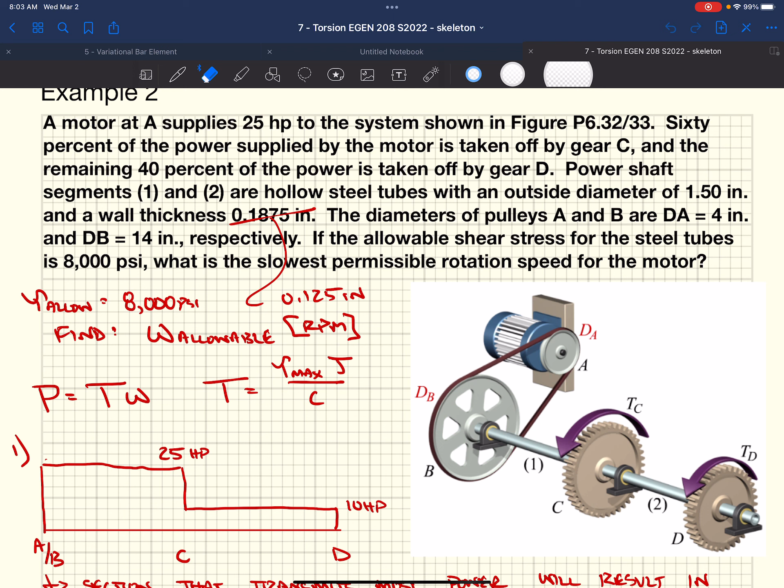So on Monday, we went through this example which helped us relate power in shafts, in particular for this class, power in circular shafts. How that power can be distributed both via gear ratios and different shaft dimensions and sizes, and how that power that is provided into a system is the torque times a rotational speed. That torque can be a function of, in our case, we were given a maximum shear stress that the shafts in our system can handle. And so that's kind of our governing limit, that's limiting how much power we could put into this, or in this case, how much speed, because we were given an amount of power that we were putting into the system. So we worked through that to figure out what is the speed of the motor required in order to not overcome the ability for our shafts to resist that torque. So we went through that.

Now we're going to start talking about, similar to what we did in axial systems, indeterminate torsional systems. What does that mean? Well, we have more unknowns than we have equations of equilibrium. In axial systems, we had some of the forces and some of the moments, we had 2 equations of equilibrium, usually. But now in torsional systems, we usually only have 1, summing the moments along the axis of our shaft.

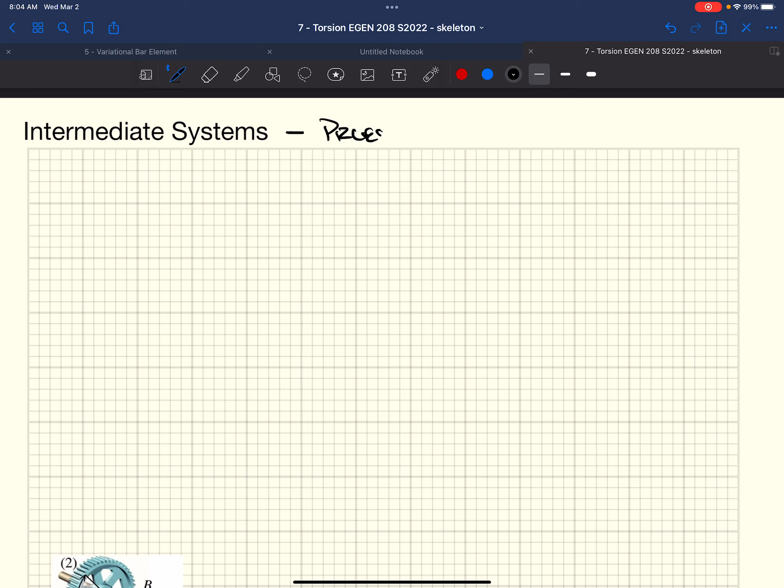So we are going to talk about the process involved with, welcome. What'd you do? Oh, I hurt some cartilage in my knee. Ouch. Are you done for the season, I assume? Yeah. Bummer, didn't mean to rub it in.

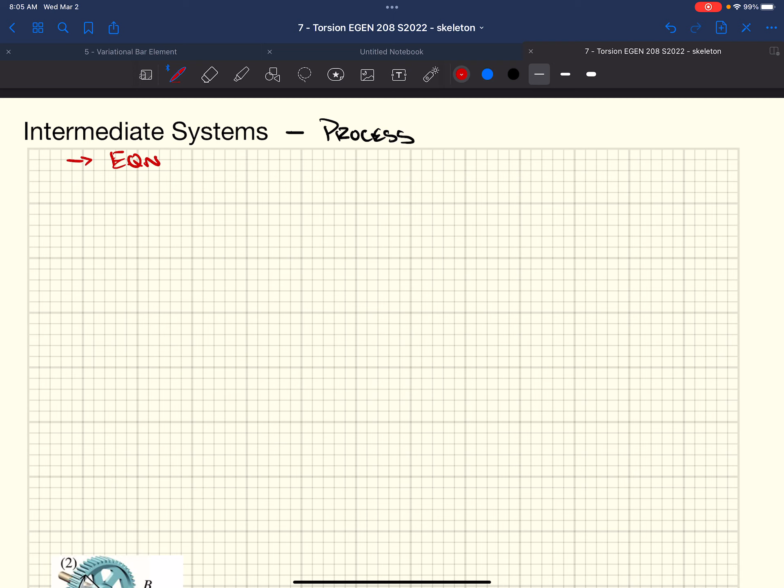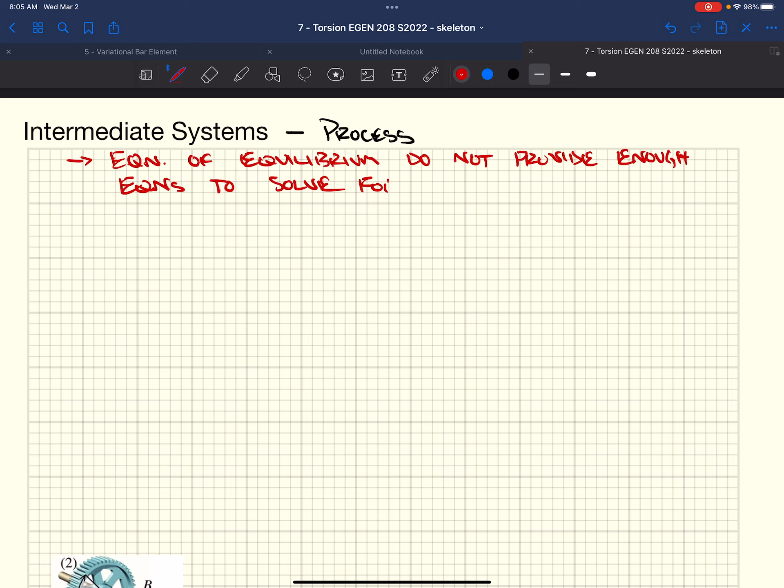So what's the process here, if we have an indeterminate system? Well, first off, when we have an indeterminate system, we have our equations of equilibrium, and they do not provide enough equations to solve for unknowns. And in this case, we have sum of the moments, that's what we get, sum of the moments.

So any guesses of where we would start? What's the first thing we do in all of our mechanics problems? Free body diagram, exactly, way to go. I need to bring candy or something, that was a big win. All right, so we do a free body diagram.

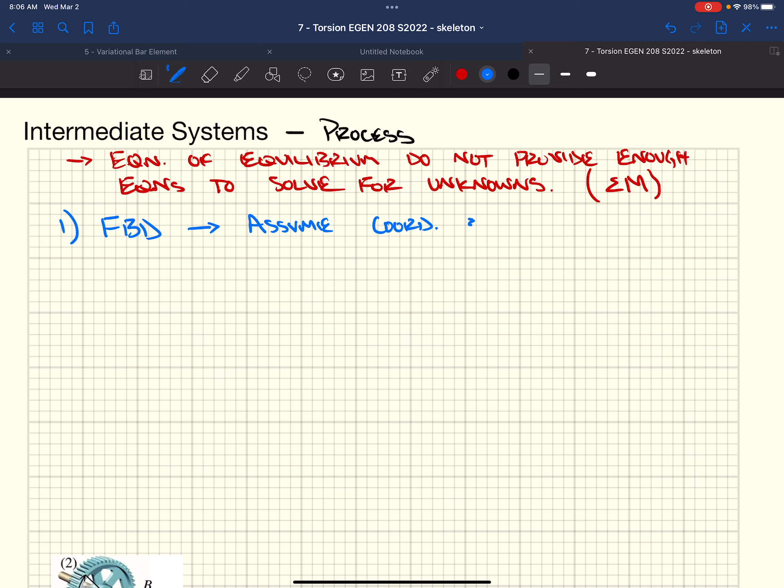In a free body diagram, we always assume coordinates, we provide our known forces on our system, display our unknown forces in our system, and based on those unknown forces, we can use the equations of equilibrium. So assume coordinates, and we're going to find our expression for sum of the moments equals 0. That is the only equation of equilibrium that we have in a torsional system, because we're essentially summing the torques. A torque is a moment, all a torque is a moment about the longitudinal axis of our shaft. And so we only have that, we have no other forces acting on the shaft.

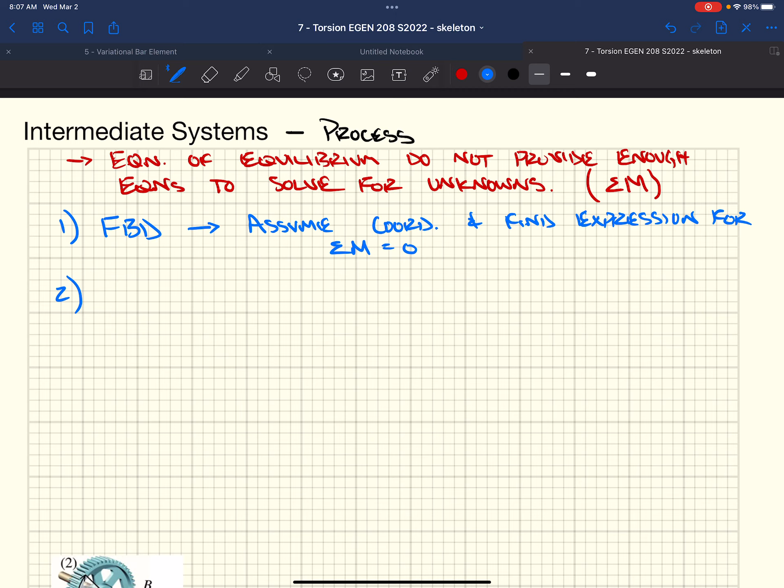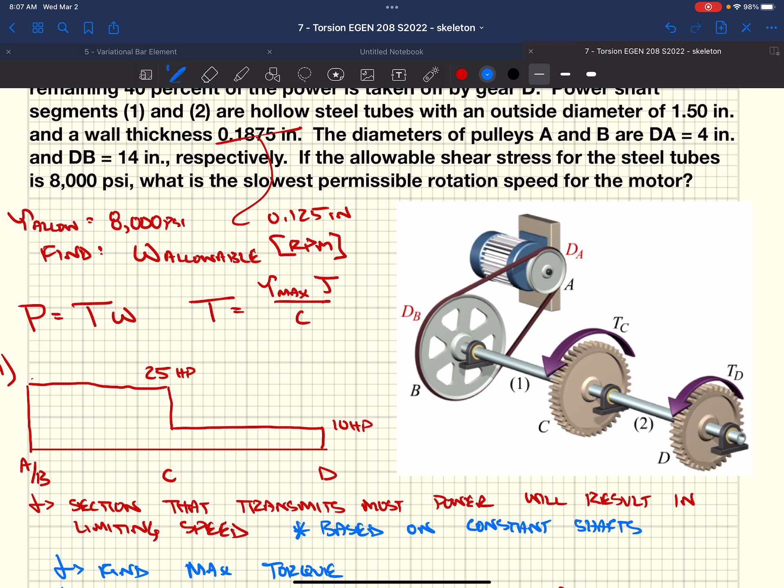Well, at this point, this is where we decide whether it's determinate or indeterminate. All of the problems that we've dealt with to date are determinate, okay? We've either been given what the extra loads are, or we only have one unknown force or torque, so we could calculate what that was.

If we do not have that, similar to the axial systems that we calculated that were indeterminate, do you guys remember what that next step was? Step 2, in indeterminate axial systems, what's the next thing we did? Set up a relationship. Perfect.

God, you're crushing it. Are you looking back at your old notes or what? No. Oh, damn it. Just a powerhouse over here.

All right, determine how the system will deform. Setting up those relationships, okay? And there's a lot of different ways that we could have a torsional system set up, similar to the axial system.

If I drew a little picture here: a shaft, and in that shaft we had a core. Say that shaft was fixed at one end, and we could apply a torque to the end of that, okay? So we have two materials, our first material and our second material, and those materials were inside of one another.

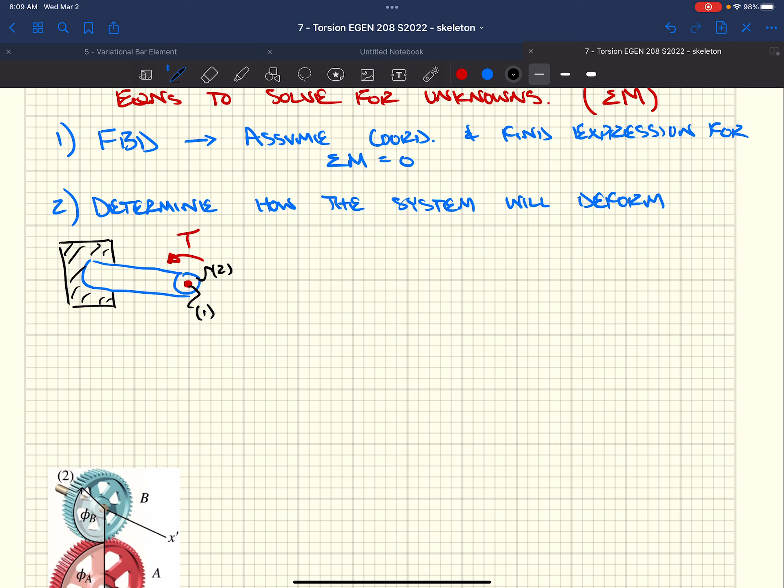So material 1 is inside material 2, they're connected inside that system. So if I rotate material 2, I'm going to rotate material 1. So if we wanted to determine the rotation of material 1, it's going to be the same as material 2. So our relationship would say that the deformation of all members is equal. That means phi1 equals phi2.

Second one: in some cases, this would be what I'd call a system in parallel. We have our two materials that are running within each other, running together, or in parallel.

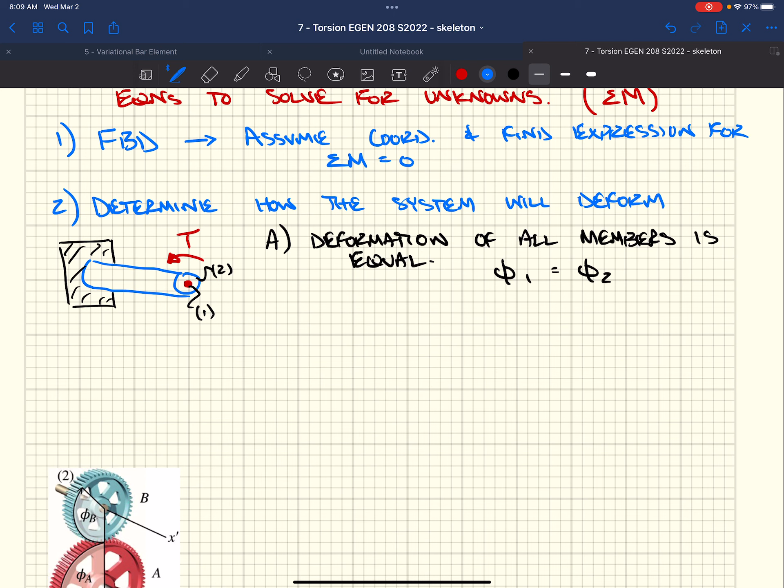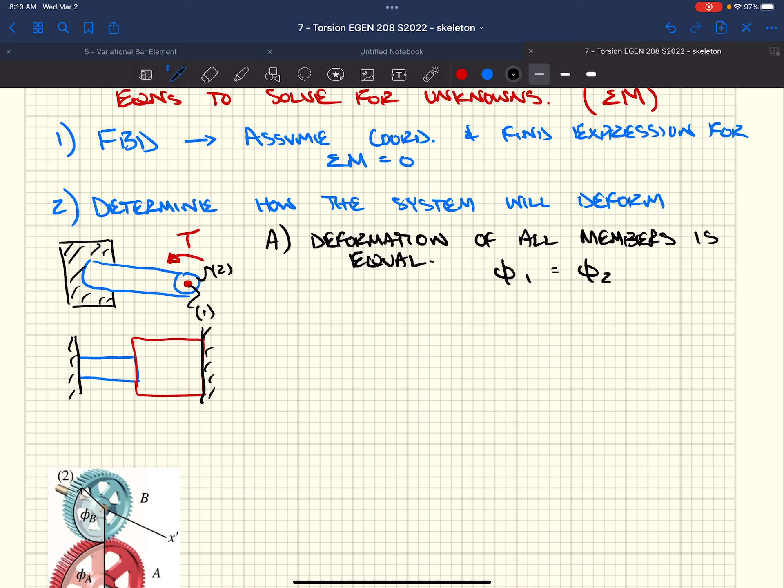Sometimes we might have a torsional system similar to what we had with our axial systems, where we have a system of shafts in series, maybe between two fixed plates. We might apply a torque within that system, at the interface between our two materials.

In this case, the total deformation is equal to 0. So we have phi 1 plus phi 2 equals 0, which is really phi total. Because we have our fixed plates, this shaft doesn't rotate from one end to the other. So if we run from our left-hand side to our right-hand side, we start at 0 rotation at our fixed support. Blue is going to rotate clockwise, and then red we have to rotate back counterclockwise to get back to the same spot as we were at the beginning, which is 0 rotation.

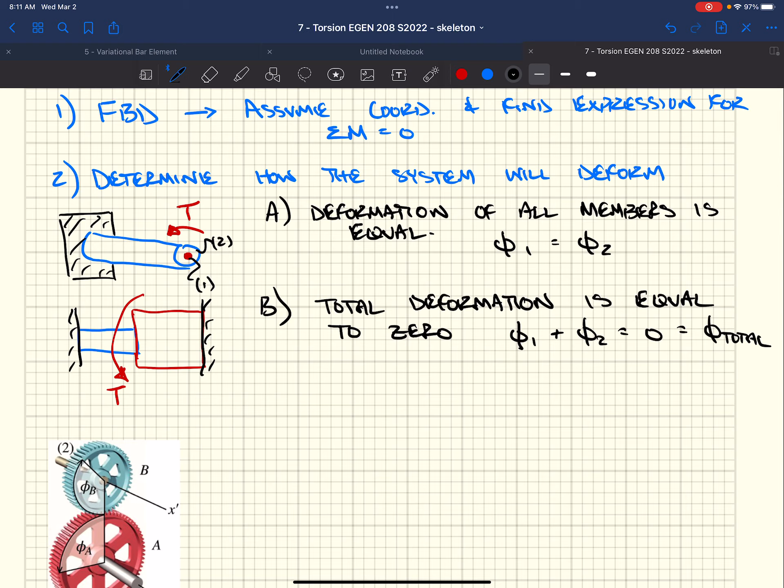Well, we've talked a bit about gears, gear ratios, and how those affect torque provided and how those can affect speed, and how that rotation can also be related between these two gears. Even though these gears are different sizes, the actual distance traveled has to be the same. So we can also reference the rotation: if A rotates a certain amount, B's got to rotate a certain amount, and the amount of those rotations is subject to our gear ratio. So we can come up with what we would call angular relationships of deformation.

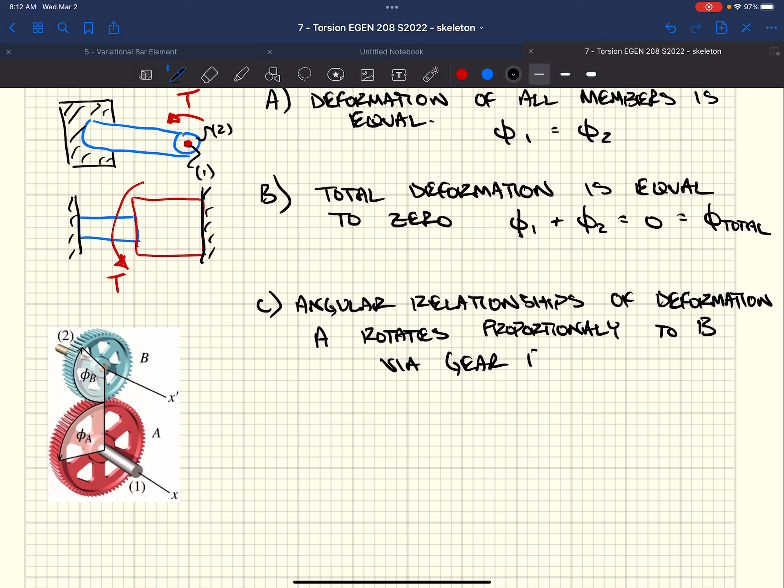We know that A, because of our gear ratios, rotates proportionally to B via those gear ratios.

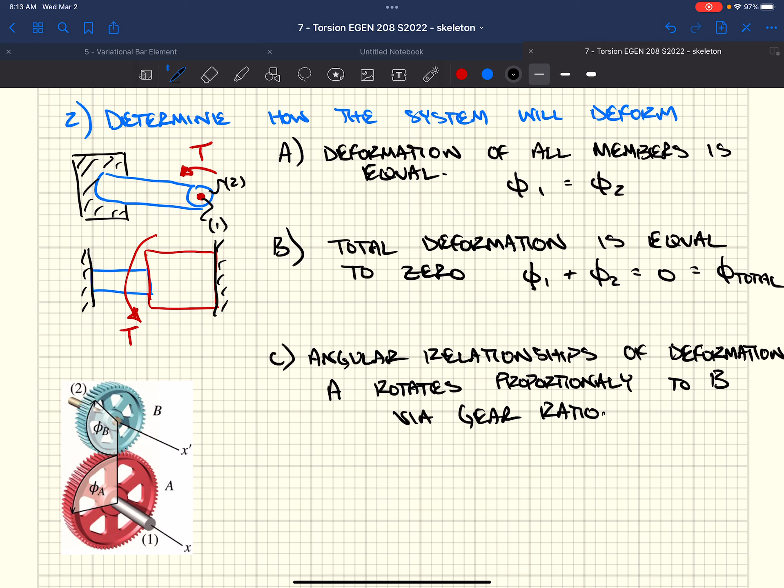So those are our three big types of system deformation relationships, some way of relating the deformation in one member or material to another. Because that's really what we're trying to do, come up with this relationship that we can devise, a way to relate forces. We want to relate force and deformation.

In torsional systems, we call this the torque-twist relationship. In the axial systems, we had this equation, delta. Anybody remember what delta was? We took Hooke's law, stress and strain relationships, smashed them all together, and got this equation that related deformation of an axial rod: FL over AE.

Okay, well we also had something very similar to that in torsional systems, where we figured out the angular rotation in radians. Remember what that one was? It relates torque, geometric properties, and material properties. So we had torque times the length over the polar moment of inertia, times the shear modulus G: TL over JG.

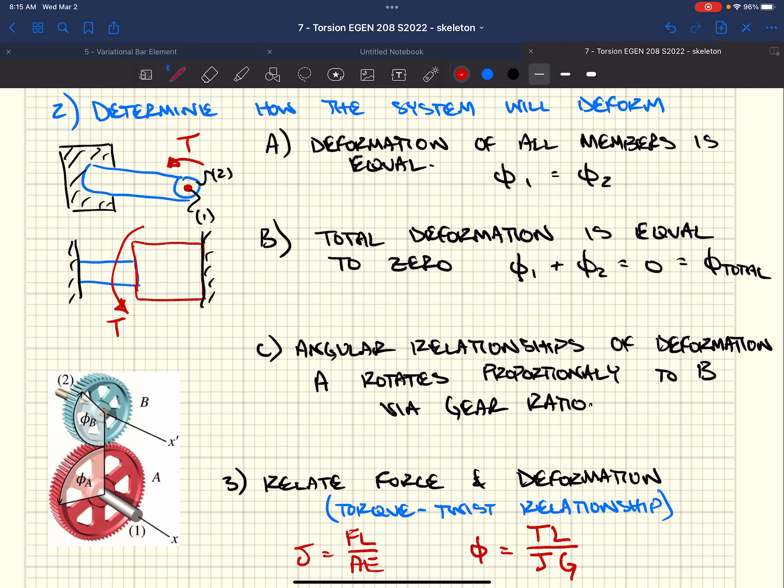So in the axial systems, we took this equation here, and we plugged it into this relationship. We're going to have some relationship that gives us displacements in axial systems, rotations for torsional systems. So we take these phis and plug them back in up here, so we can get another equation.

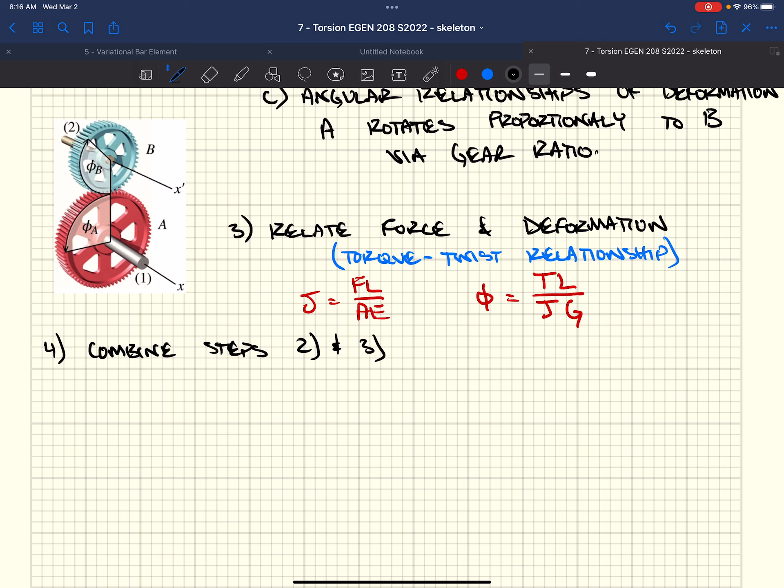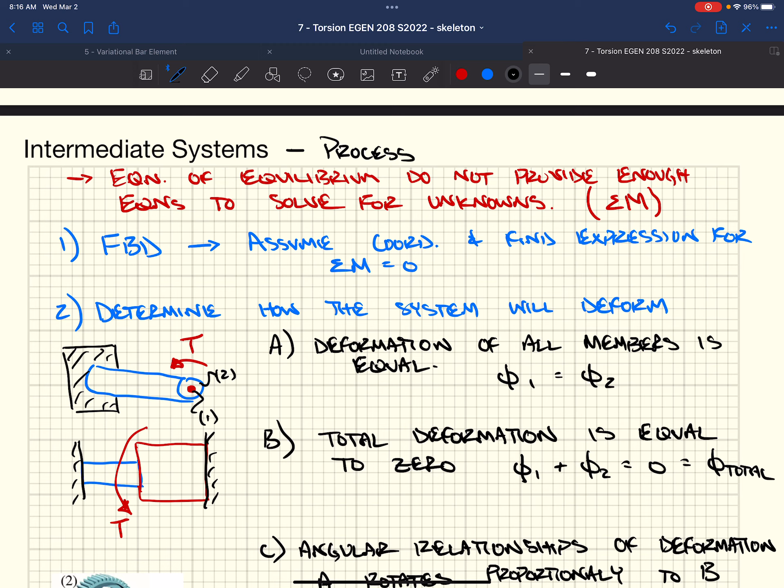So step 4, we want to combine steps 2 and 3, so that the geometry of deformation is expressed using forces. Now we're going to have this new relationship that has our unknown forces, our torques in there, relating the torque in one rod or one material to another, which is very similar to what we have up here when we sum moments, we get the relationship of torque in one rod to another.

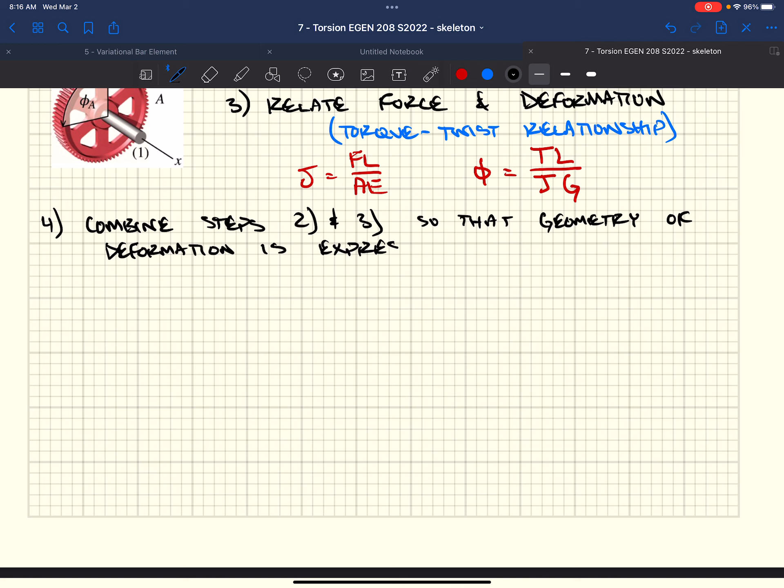And so now we essentially get another equation. We can combine our steps so that geometry of deformation is expressed using forces. We call this the compatibility step, because we were developing compatibility equations, essentially relating this deformation with forces.

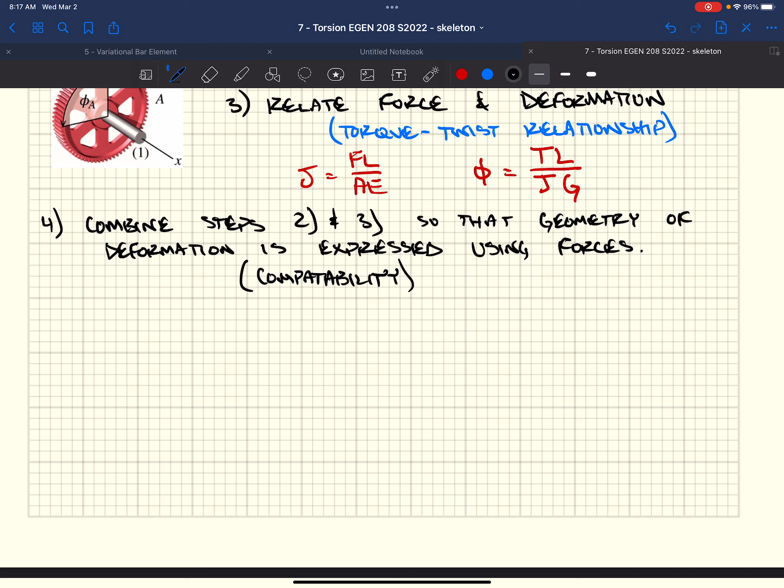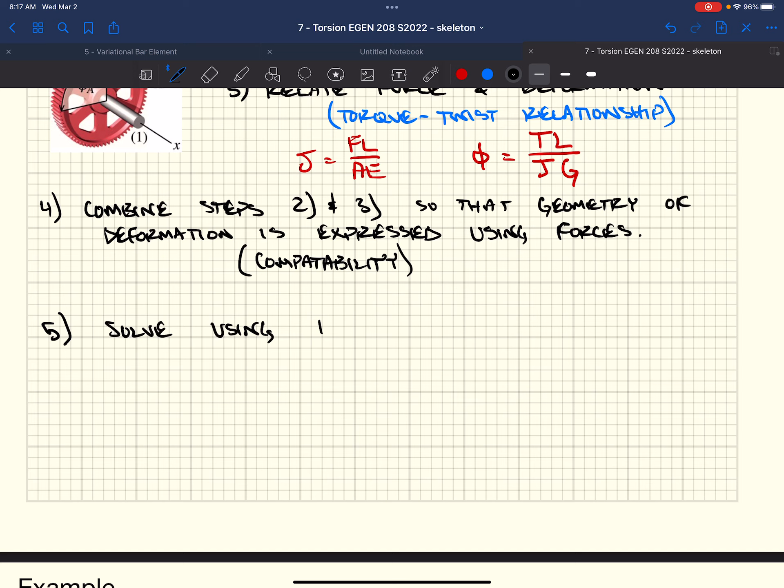And then finally, we can solve these systems of equations using our equilibrium equation. Here, we're trying to solve for torque. And once we have that torque, we can then solve for shear stress in our shafts, and so on.

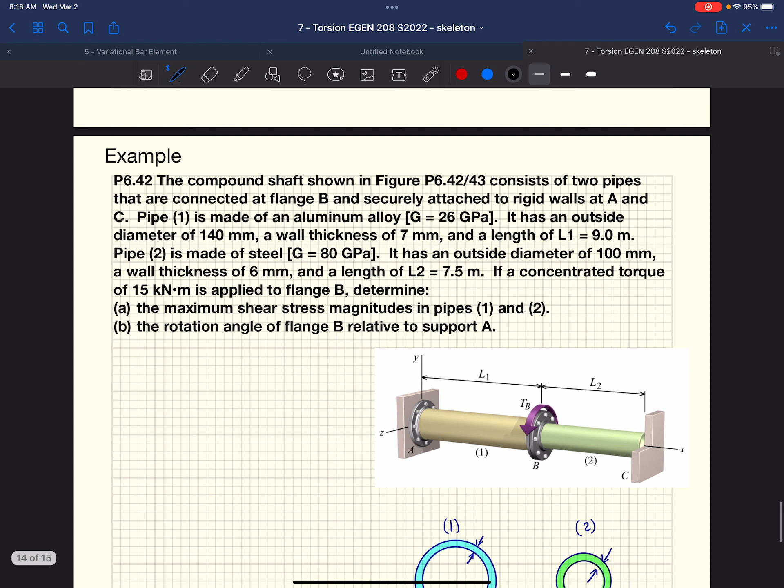Okay, we're going to go through an example. So we have two shafts that extend in series. We've got material 1 to material 2, extending between two fixed plates, and we're applying a torque at the center, the coupler between our two materials.

They give us all sorts of fun information about this. They say that pipe 1 is made out of aluminum, pipe 2 is made out of steel, so we have different shear moduluses for each of those. Steel is 80 gigapascals, stiffer than aluminum at 26 gigapascals. The aluminum pipe, pipe 1, has a larger diameter than pipe 2, so we have a 140 millimeter pipe that runs to a 100 millimeter pipe. And then we have thicknesses of our walls, and we have different lengths, and they tell us the value of our concentrated torque in kilonewton meters.

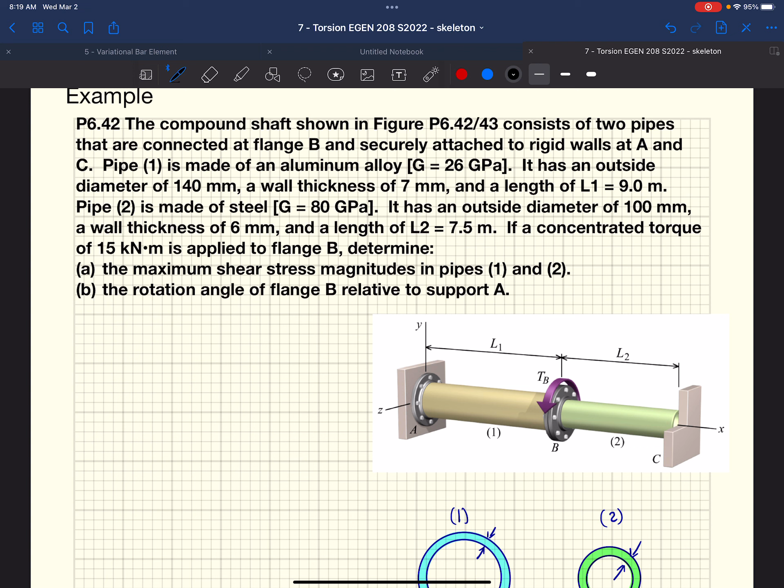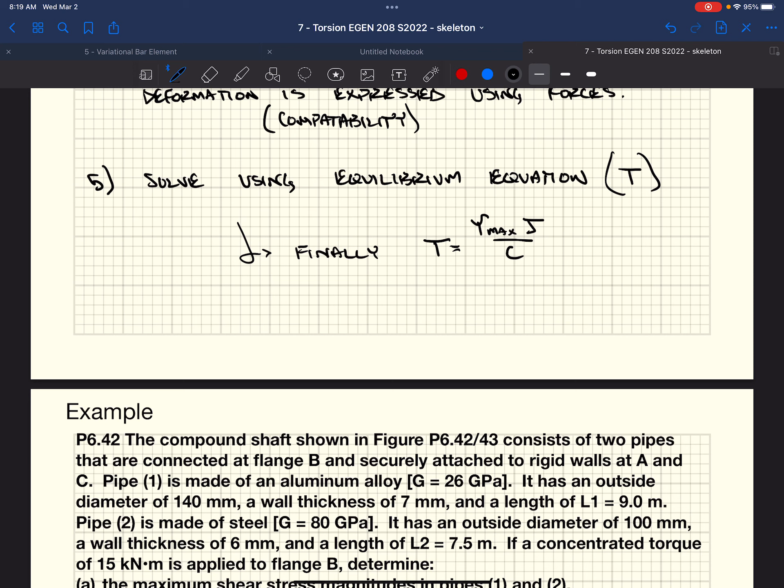And they want us to determine a number of things: what's the maximum shear stress in each of the pipes? As we just found, we have an equation for the maximum shear stress. We need the polar moment of inertia and the max radius, which we can get out of the dimensional information they gave us, the max diameter and the wall thickness. And then we need to figure out what the torque is, which is something we do not know.

Next one: what's the rotation angle of flange B relative to support A? So really they just want us to calculate phi for rod 1, TL over JG. So we can figure that out.

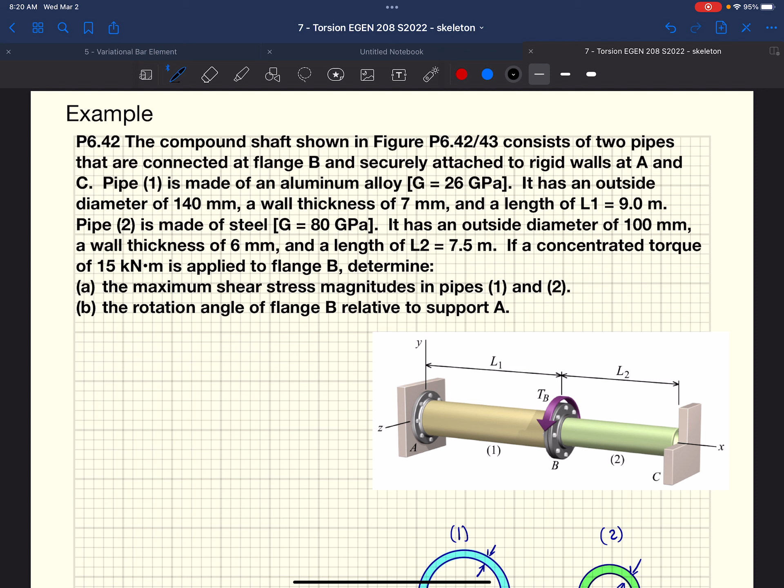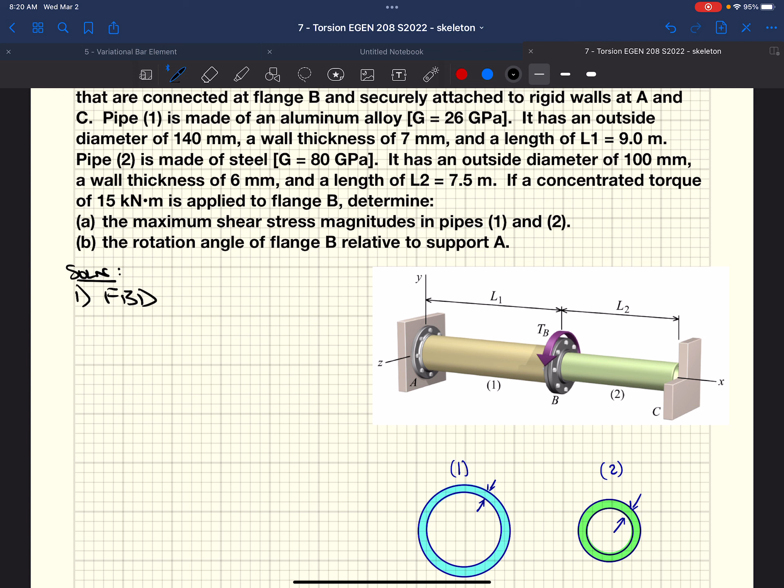So we have one equation of equilibrium, we're going to start there, with a free body diagram. Step 1, we have our free body diagram. I am going to cut, because we need to figure out internal forces.

It probably wouldn't make much sense if we drew a free body diagram to the end. That really doesn't encapsulate our applied torque at the center. It doesn't show us any forces that'll let us calculate known or unknown forces. We'd miss the boat on figuring out what the torque is in rod 2, which they asked us for the shear stress.

So instead, I'm going to cut out the center of this torsional system. This way we capture our applied torque, and I'm able to display internal torques in both rod 1 and rod 2. So we're going to start by saying that's the coupler. We have our 2 rods.

We need a coordinate axes. So I'm going to walk through now, transferring known and unknown forces, in this case torques, to this free body diagram. If I look at the applied torque at 15 kilonewton meters, or TB, and use the right-hand rule, and cut this, so this is rod 1 and rod 2, this x-axis is the same as that one. So if I curl my fingers in the direction of torque B, my thumb's pointing off to the right.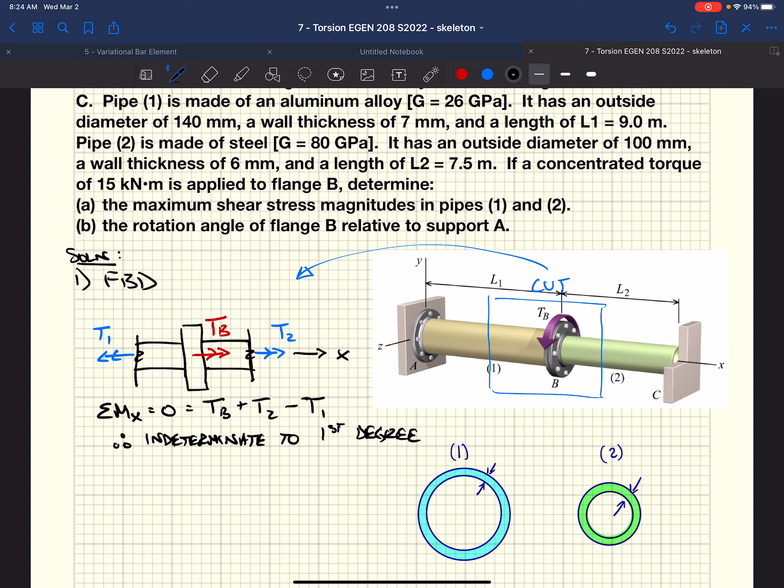As was outlined in our process for indeterminate systems, this is where we start setting up our relationships. We need to assess the deformation.

Let's assess the deformation. Out of our 3 different torsional system types, what can we say about the deformation in our 2 materials? 2, 0, right? Exactly, because we have 2 fixed ends, and if we travel through our system from the left-hand side at A to the right-hand side at C, we're going to start at 0 rotation. We're going to twist a little in rod 1, then twist a little in rod 2, but we got to come back to the exact same orientation we were at the beginning. They're both fixed, they don't rotate.

So we can say that our total rotation is 0, and that rotation, when we move from the left-hand side to the right-hand side of this shaft, phi1 plus phi2 has to equal 0, okay?

Now we get to relate our force deformation, or torque twist relationships. Well, we know phi1 is just going to be the torque in 1, the length of 1, the polar moment of inertia of 1, and the shear modulus of 1. We also know that the rotation of 2 is going to be the torque at 2, the length at 2, the polar moment of inertia of 2, and the shear modulus of 2.

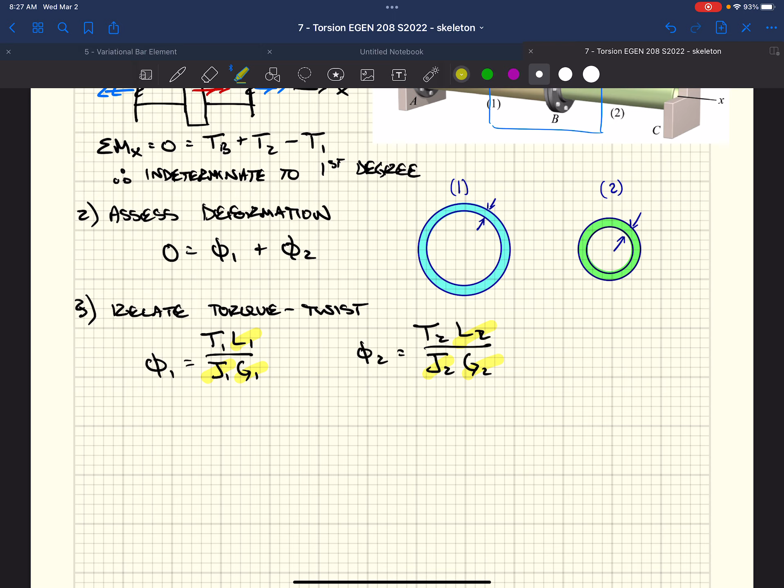In our case, rod 1 had an outside diameter, our big D equal to 140 millimeters. For pipe 2, it was 100 millimeters. We know the thickness for the second pipe, or the steel pipe, was 6 millimeters. And they gave us that the thickness of our aluminum pipe was 7 millimeters.

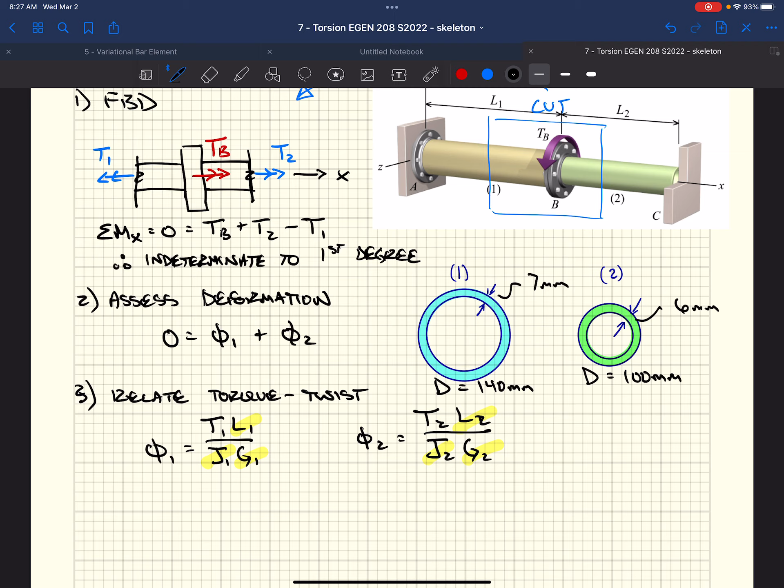Well, we know the polar moment of inertia based on our notes, and based on our diameters, we can say that the polar moment of inertia is pi over 32 times outside diameter to the 4th minus the inside diameter to the 4th. This would be outside, this would be inside.

Well, if we did that for number 1, we take 140 millimeters, we subtract 14 millimeters to get the inside diameter. We could plug those values in. We get J1 equals 12.97 times 10 to the 6th millimeters to the 4th.

J2, we do that same process. We do pi over 32 outside diameter to the 4th minus the inside diameter to the 4th, and we end up with 3.93 times 10 to the 6th millimeters to the 4th.

What does this tell us? This tells us that there's a difference in stiffness between the 2 pipes with respect to rotation. Moment of inertia, as you guys are working in the homework, from statics, is the resistance of a cross section to bending, rotation. So it'd be like this I shape, twisting this way and twisting this way.

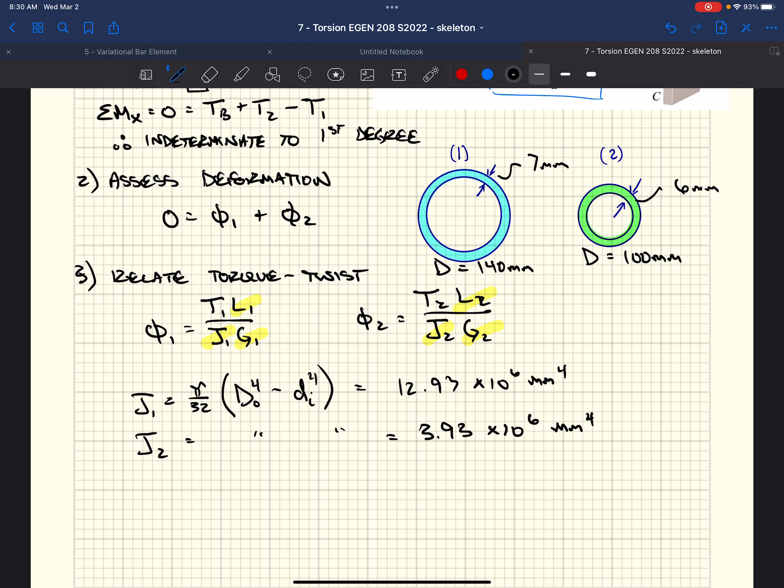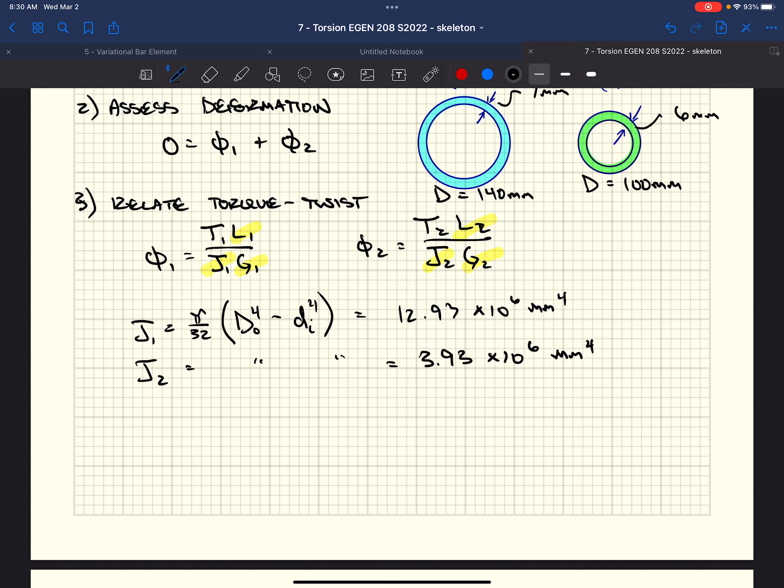So next, the idea is we have this torque-twist relationship, and we can plug that value into our deformation assessment. So step 4 was to combine steps 2 and 3. Now we get this equation that says we have 0 rotation from one end to the other end of our system. That rotation is going to be the sum of the rotation of the first shaft plus the rotation of the second shaft. So we end up getting T1 L1 over J1 G1 plus T2 L2 over J2 G2.

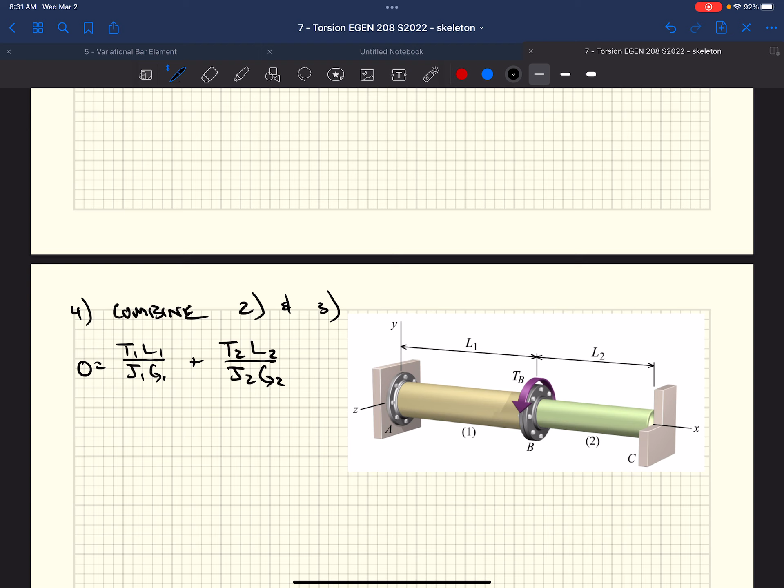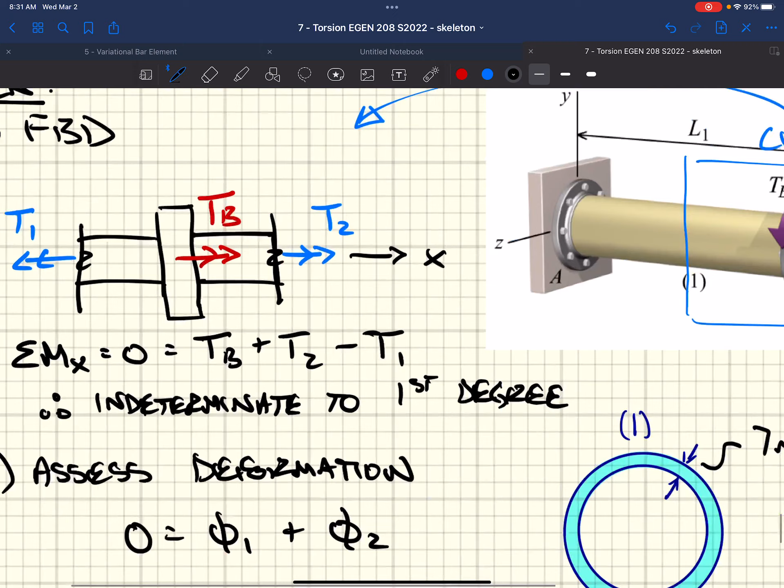Well, we really want to take something out of this equation. Now we have two equations, two unknowns. We have L, J, and G for both of our two members, 1 and 2. The two unknowns in this equation are T1 and T2. The two unknowns in our equilibrium equation are T1 and T2. Two equations, two unknowns. We solve that by manipulating one equation in terms of one of the forces and then plugging that into the other one. So what am I going to do? I'm going to manipulate these equations to get us an equation for, say, T1 or T2. In my case, I'm going to do T1.

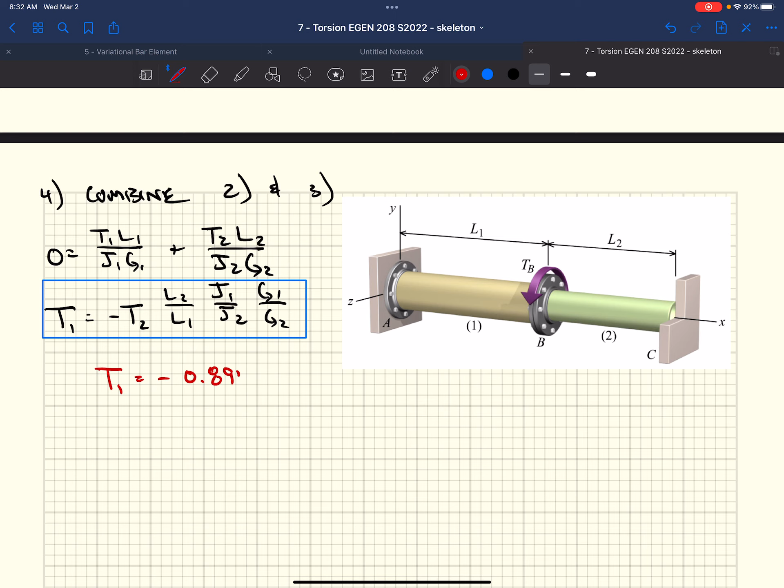So if we rearrange this for T1, we get that T1 is negative T2 times L2 over L1, J1 over J2, G1 over G2. If we take all of those values, L2, L1, J1, J2, G1, G2, we can plug everything in and come up with an expression for T1 equals negative 0.894 T2.

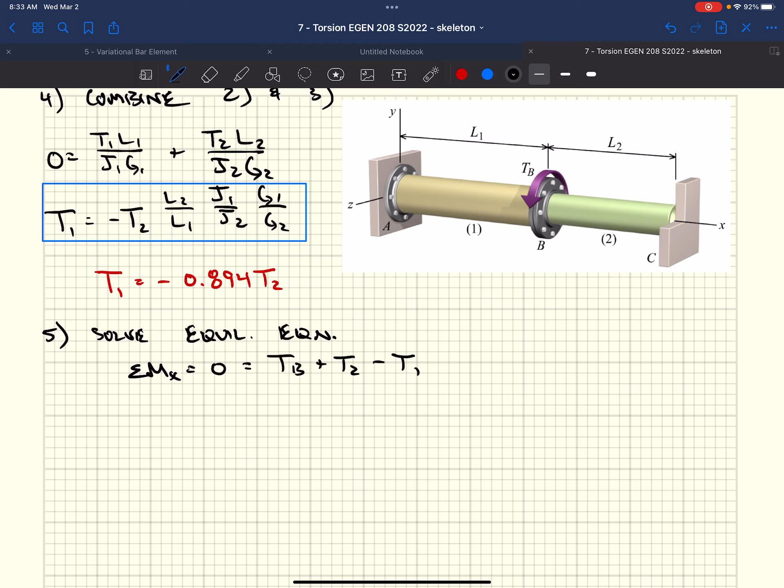Well, now that we have this expression, we take the expression we have for one force in terms of another, and we plug it into our original equilibrium equation. Then we can solve for our unknown forces. So step 5 is we want to solve our equilibrium equation. What does that look like? Well, we have sum of the moments about x, we set that equal to 0. We said it was TB plus T2 minus T1, or TB equals T1 minus T2. That all equals TB, which was 15 kilonewton meters.

All right, plug in our relationship between T1 and T2. So now we have 15 kilonewton meters equals negative 0.894 T2 minus T2. We get T2 equal to negative 7.92 kilonewton meters. And if we plug this back in, we're going to get T1 equal to 7.063 kilonewton meters.

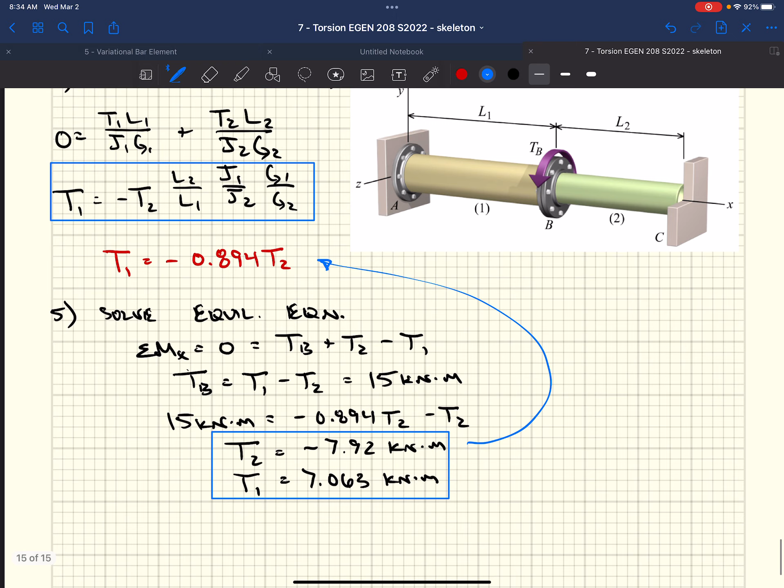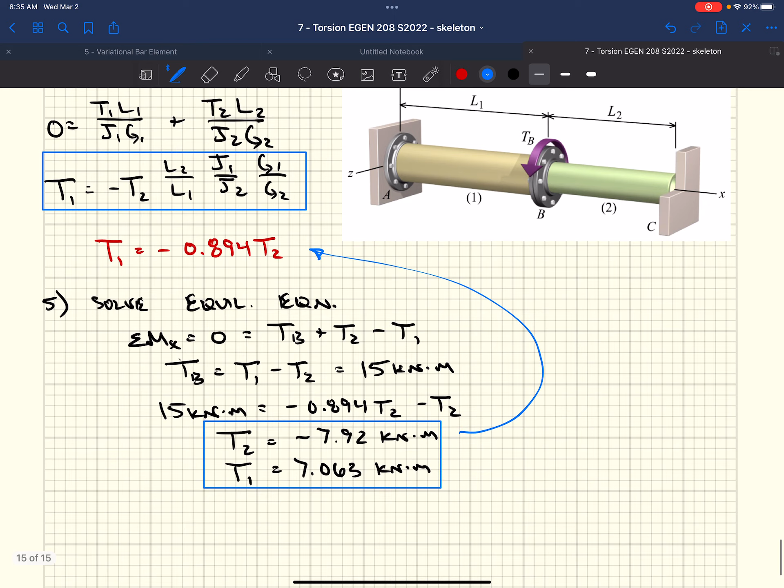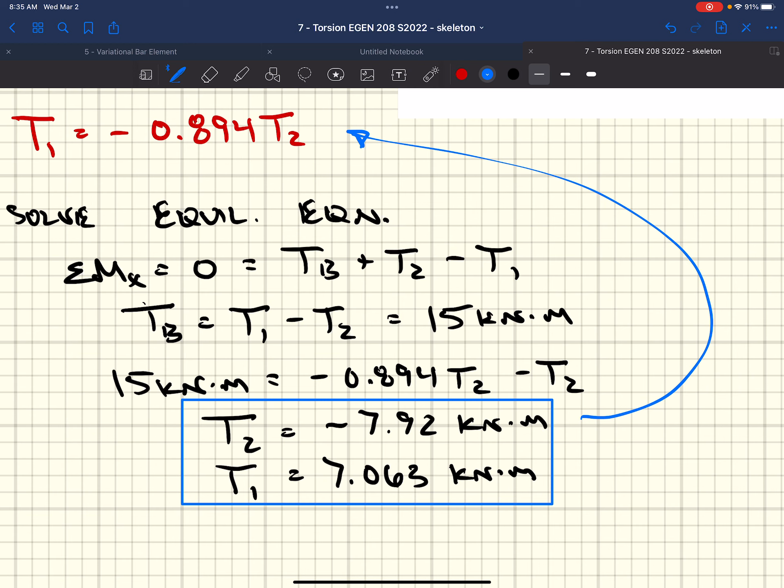Which is interesting, because at the beginning when we were calculating J, I said that the steel pipe was about a quarter of the stiffness, or a third of the stiffness, of the aluminum pipe. But the fact that our shear modulus is so much larger for our steel pipe than our aluminum pipe, our steel pipe, which is T2, ends up taking more torque out of that system than our aluminum pipe does. So material ends up playing a big role in how forces are distributed.

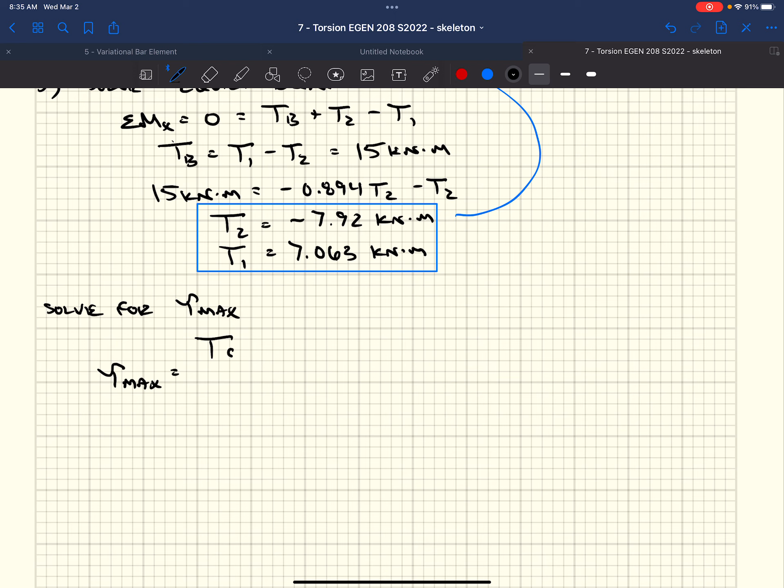So we have T1 and T2. They asked us for what is the maximum shear stress. Well, now at this point, things become pretty simple and fairly trivial. We just take our known values now: we have the max radius, we have the polar moment of inertia, now we have the torque supplied. We can use our torque-stress relationship, rearrange it for tau max. We end up with the torque times the max radius over the polar moment of inertia gives us our maximum shear stress.

We can plug that in for each of our pipes. So the maximum shear stress in our aluminum pipe, or pipe 1, is going to be the torque at 1 times the max radius of 1 over the polar moment of inertia of 1. Make sure we watch our units. I'm going to have mine come out in megapascals, or newtons per millimeter squared. Our second is going to be 100.8 megapascals.

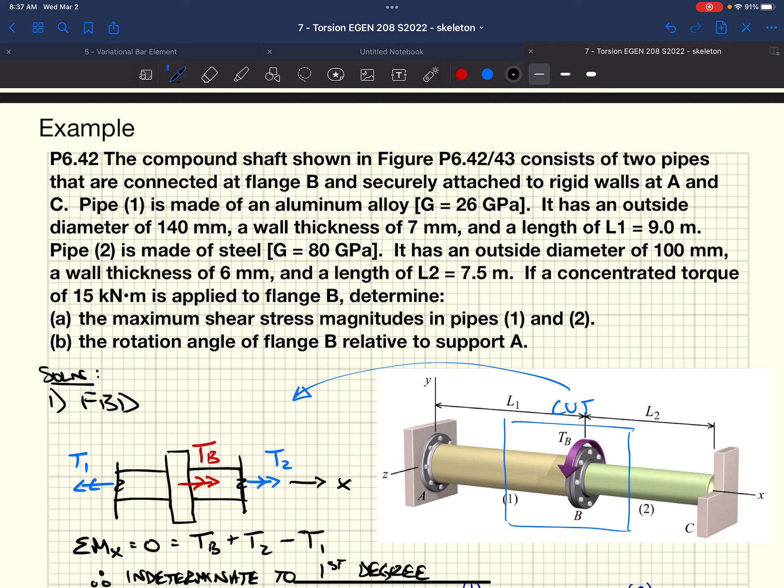Our steel shaft, even though it was smaller in diameter and thickness, had a shear modulus of 80 - about three times as stiff with respect to our material properties. So we got more torque. Well, now that we have more torque in our steel member, our maximum radius is smaller, our polar moment of inertia is smaller, so now our stress is larger.

To get those stress maxes and G's, you just plugged in stuff in that equation. So tau max of 1 is the torque in 1 times the maximum radius of 1, over the polar moment of inertia of 1. Maximum radius for the outside diameter, right? All the way to the outside. Even with a pipe, we're looking at what's going on the very outside of our pipe shell, which is the maximum radius, all the way out.

Part B, they asked us for phi, the angle of rotation. Again, we have everything now, so these are pretty trivial, right? T, L over J, G.

So if we do the same thing, we want to make sure we watch units, because this is in radians or unitless. So we want to make sure if this is in kilonewton meters, the rest of our stuff is either in meters, or newtons or kilonewtons, all of those things to make sure everything is balancing top and bottom.

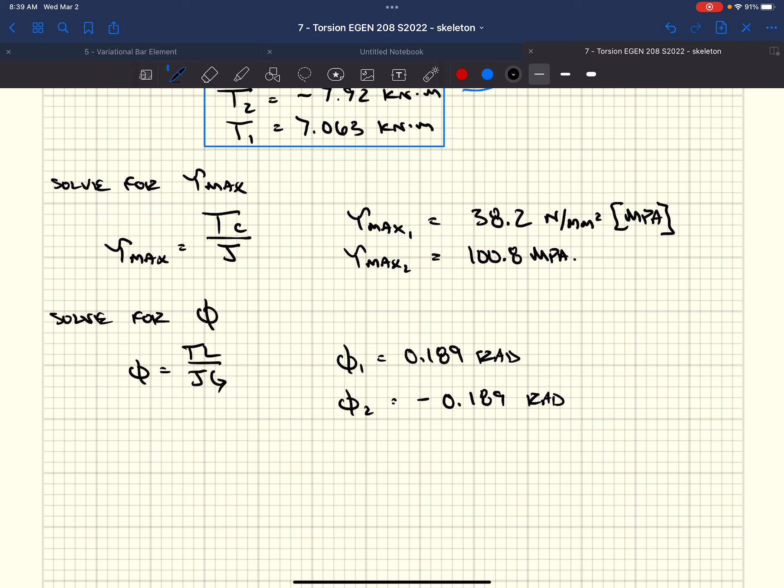So in this case, if we plugged everything in, we get 0.189 radians for pipe 1, and we get negative 0.189 radians for pipe 2, which if we go back to our deformation relationship, we said originally that the rotation of 1 plus the rotation of 2 equals 0. And plugging in our values, we get that.

Questions? Fairly involved, right?

All right, we just finished up what we should have finished up about a week and a half ago. All right, congrats, you did it. Woo. All right, so that's torsion.

Yeah, we should clap now. I almost thought about clapping when you fell asleep. You guys ever done that in class? Somebody falls asleep, you get everybody else in the class to start clapping, and then when that person wakes up because everyone's clapping, they just start clapping. It's early, I get it. Or you just get everybody to leave the classroom. I've done that also. All right, so be careful, don't fall asleep. All right, this stuff is riveting, right? You shouldn't fall asleep.

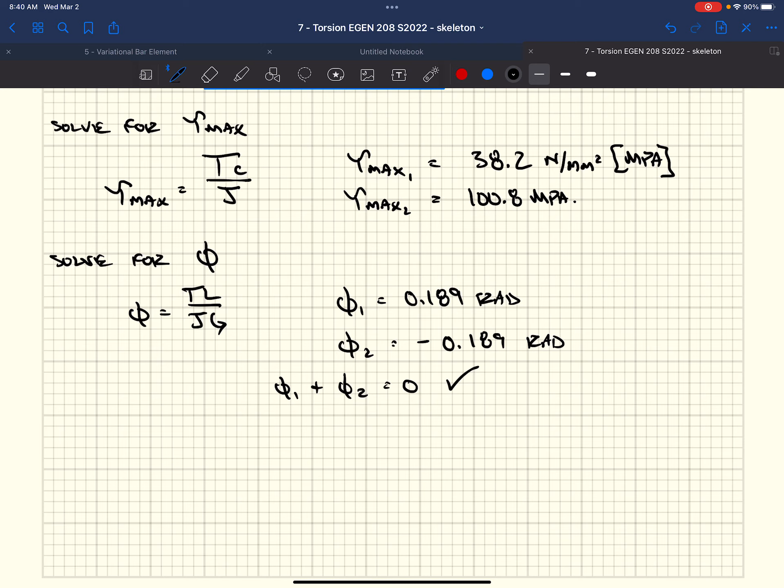All right, so now we're going to step into stress concentrations and combined loading. So we have axial loads - we've gone over axial loads, we've gone over torsional loads - so now we can look at systems. The real world is more complicated than these very rudimentary, simple systems where all we're going to have is axial load or torsional load. We're going to end up working on bending, and so we're going to end up having all three. But we're going to step through adding both of them together.

Before we do that, I wanted to step back with respect to axial loading and torsional loading. We initially talked about this idea of St. Venant's principle - the idea that if you had a column, like this box lectern here, and I put a point load on it with my fist, the top sheet of this thing sees my fist as a very concentrated load, right at the very surface. As we start moving further and further away, what St. Venant found is that once you get, say width was 2 feet, once you get 2 feet down into this member, it doesn't really care about my fist anymore.

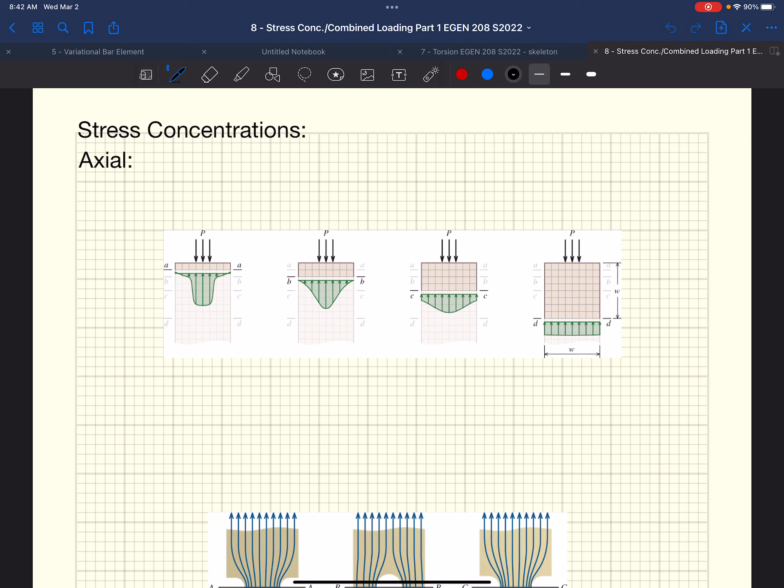Everything becomes uniform, it starts smearing out. It becomes uniform, and this is what we've been looking at to date in this class - just assuming that if we pull on something, it becomes uniform relatively quickly, especially with respect to the problems we've been looking at, because we're not looking at a column that's 2 feet square, we're looking at something like a couple inches square. So when you have something a couple inches square, you only get 2 inches down, and that rod no longer cares about how it's being connected and how that force is applied. It's going to assume that force becomes uniform, okay?

That makes sense? So, well, I guess a couple things here first - stress concentrations, we're going to talk about chapter 5.2, 5.7, and 6.10. That's the torsional. So we're going to start in the axial chapter, which is in chapter 5. And like I said, this is St. Venant's principle.

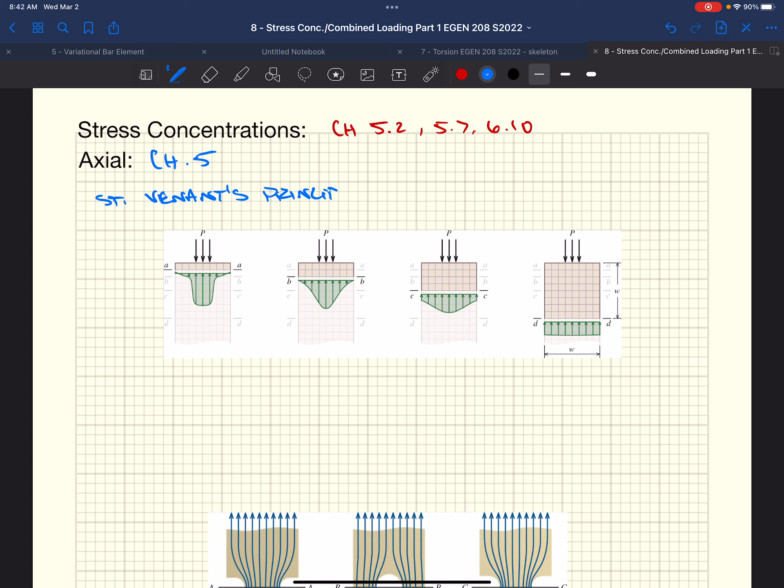And the big thing to take away is that in systems, if you're looking at say the roll cage on a go-kart or something like that, and you have axial demands on those pipes and connections between them, relatively quickly those pipes start seeing just a big uniform load.

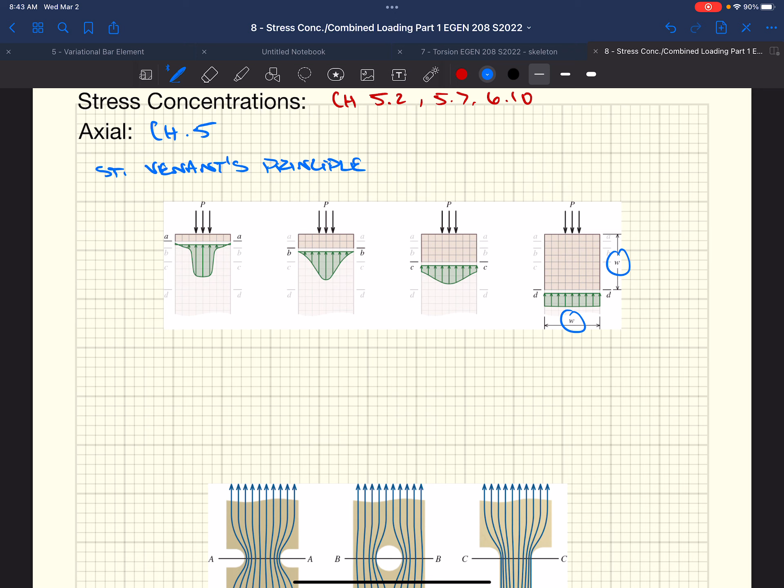But if we were to look at very small changes in geometry, right at that change in geometry we end up getting what we call stress concentrations. Those stress concentrations exist because what we end up having is what we call stress trajectories. They are parallel to our max normal stress.

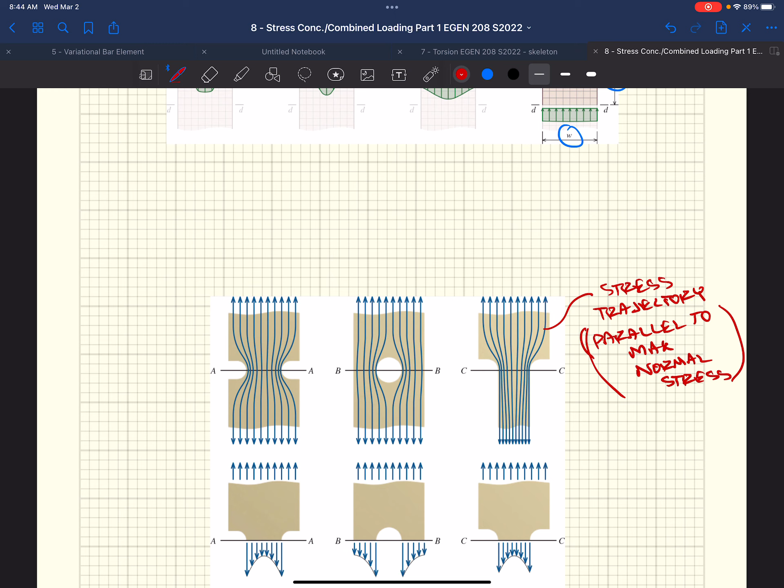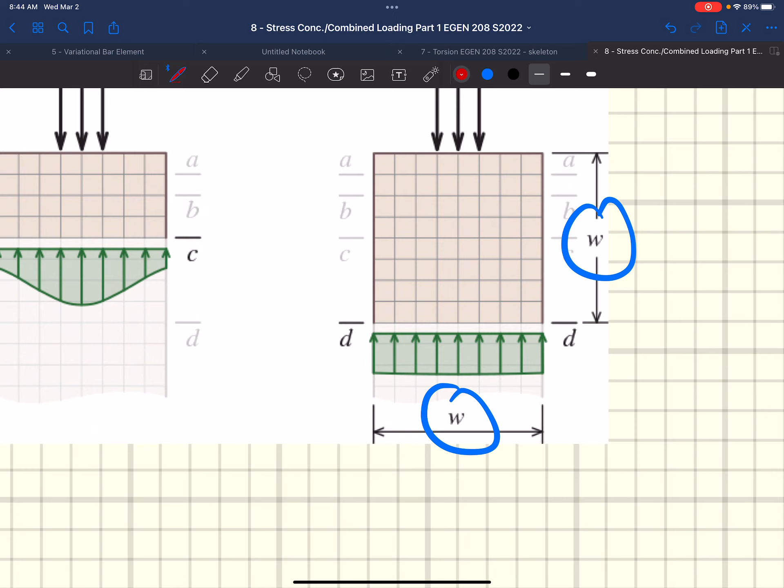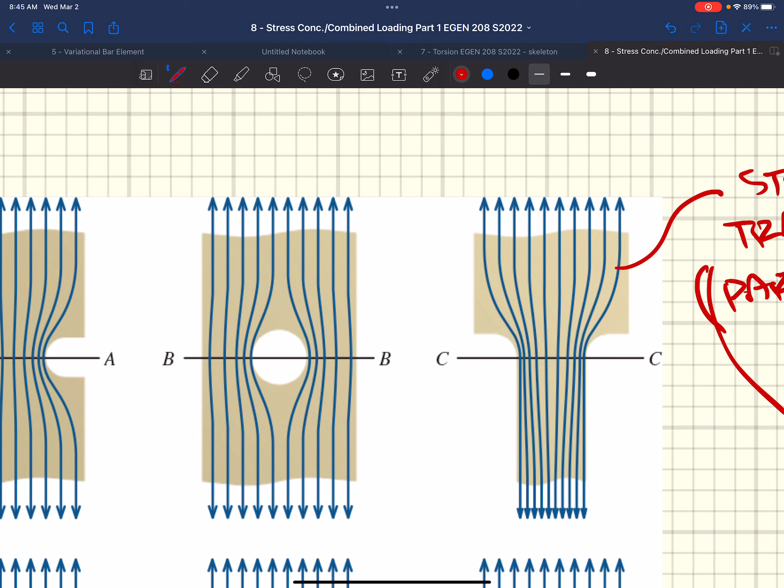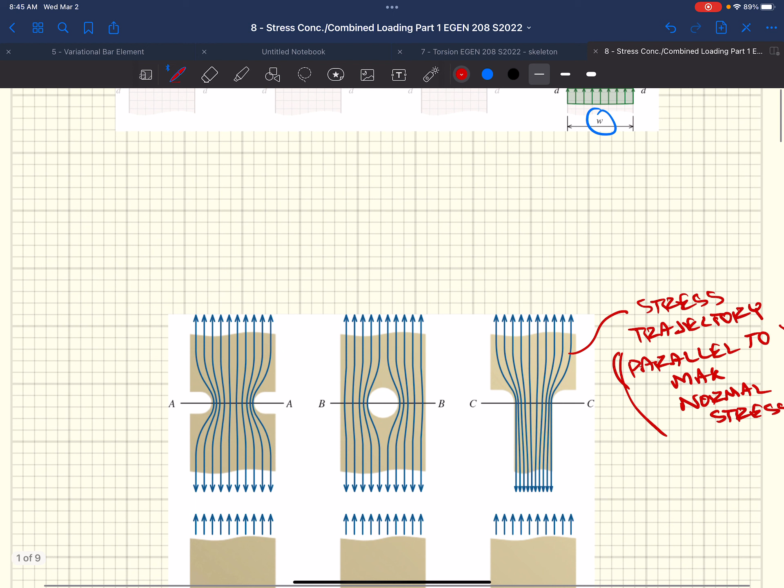So we're essentially taking this nice uniform stress orientation in our cross section, and now we abruptly change the geometry. So now we take all of that stress that used to have the whole cross section to travel along, and now we've got to go through a notch. We've got to take those stresses that were nice and uniform on one side or the other, and squeeze them through, or squeeze them around, or have them go from a small width to a larger width, or vice versa. So what squeezing those stresses does is, we're reducing geometry, we're changing the cross section, and so we end up spiking or increasing the stresses around those discontinuities. So we end up with concentrations at interruptions to our stress path.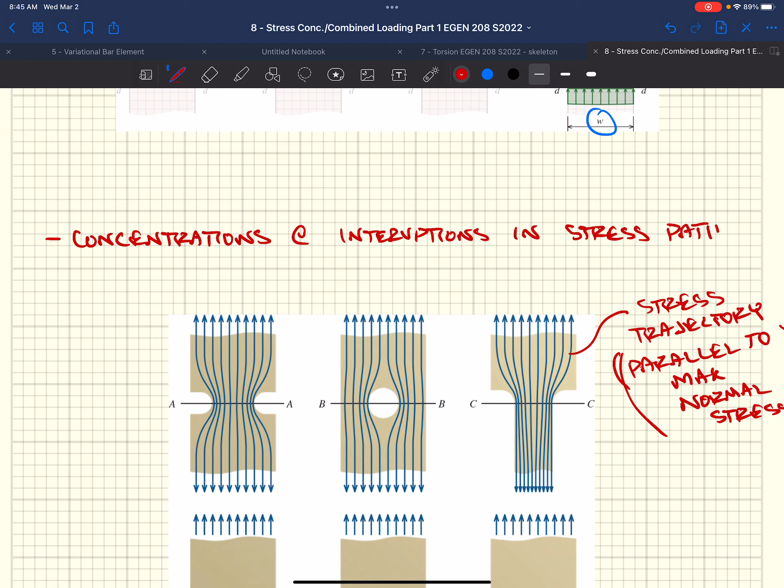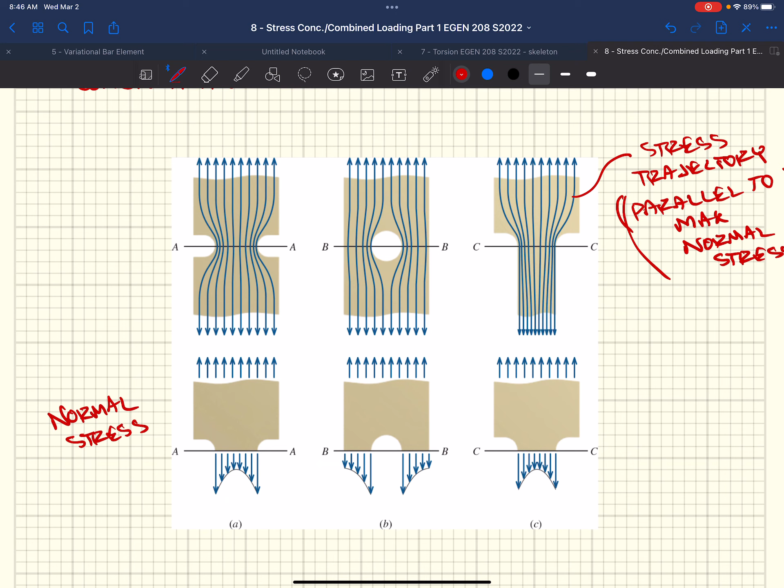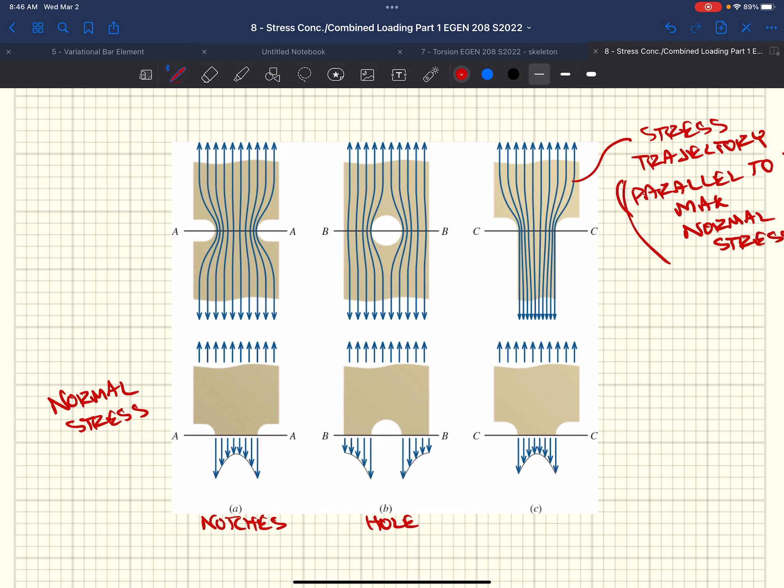So if we looked at the normal stress, as we try to smash this nice uniform stress path, these trajectories, when we start to smash them through a smaller cross section or around a hole, we end up getting spikes in our normal stress. So we have notches, we have holes. We call these shoulder fillets.

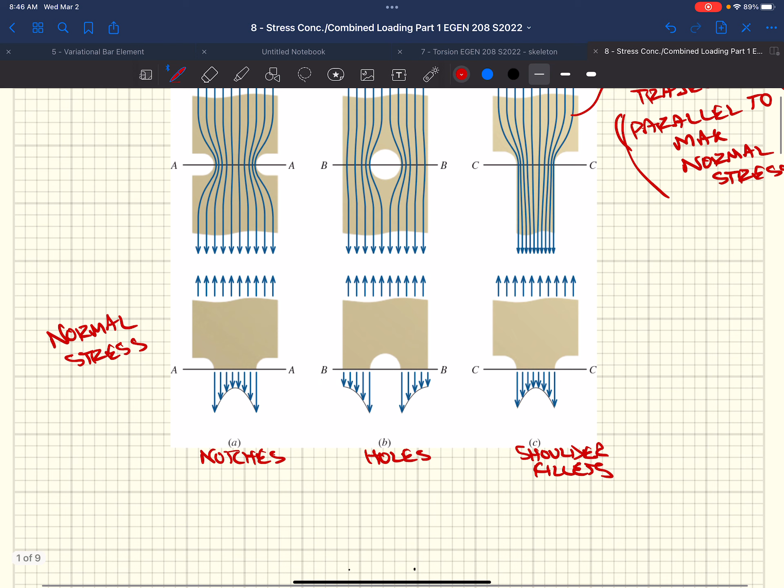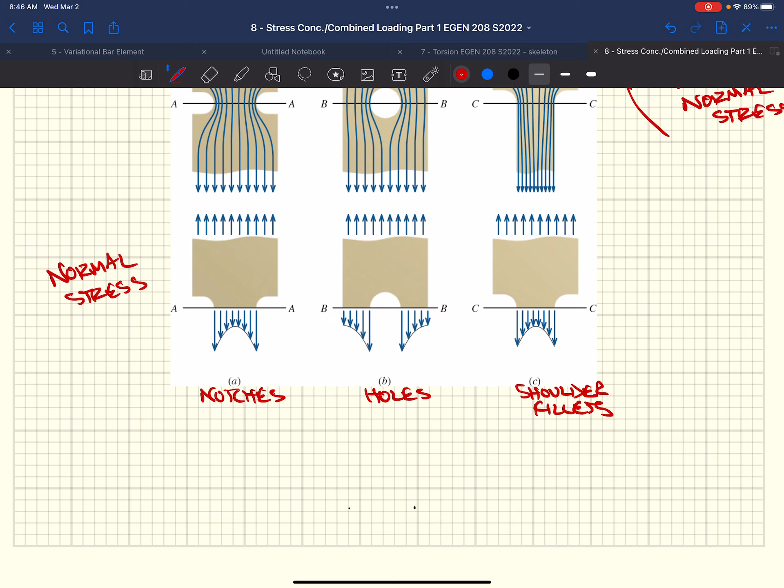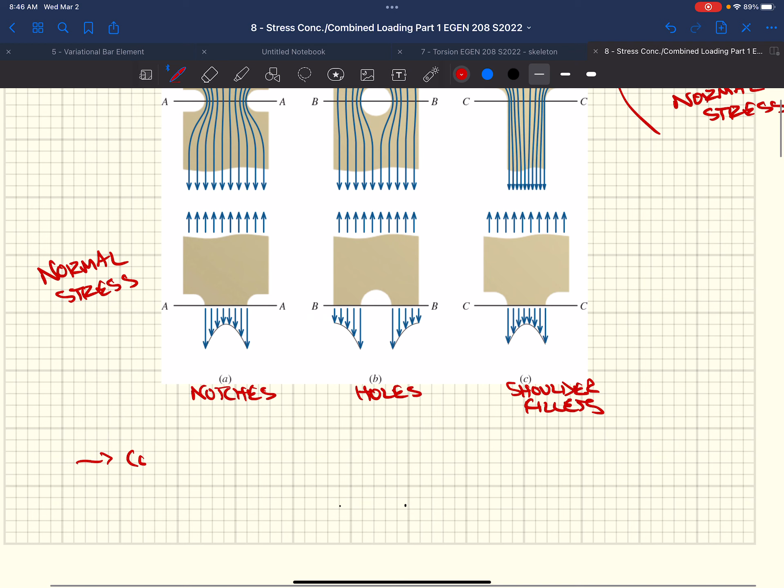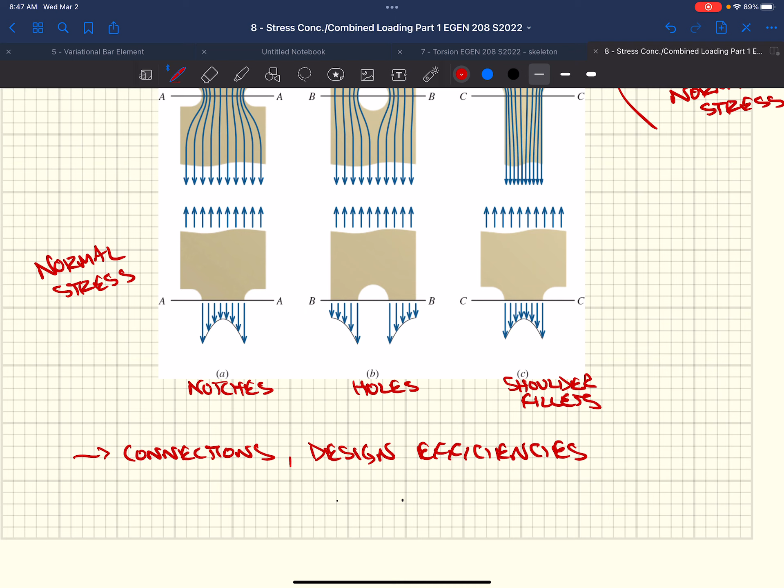And it's hard to get away from these. There's a lot of things that make us want to change geometry, put notches in things. Everything's not just going to be the same uniform shape. We have to connect things together - bolts are a very nice way to do that. We might want to impose design efficiencies. We might need more material at a certain location, but then that material, as we continue along its path in the system, we might not need all of that material, so we want to neck that down. We don't want to use as much material or size of our pipes and whatnot. So we want to impose some design efficiencies, and the system might require it - the application of whatever we're designing it for might require some changes in geometry along the way to accommodate its intended purpose.

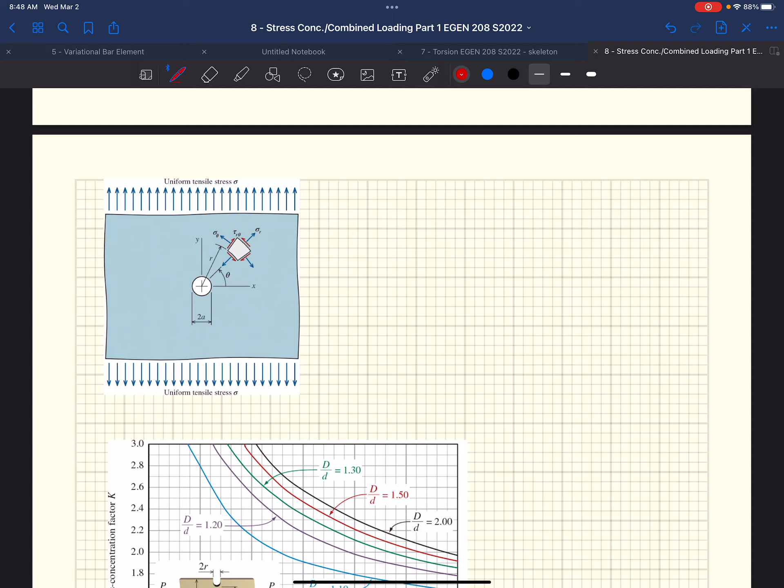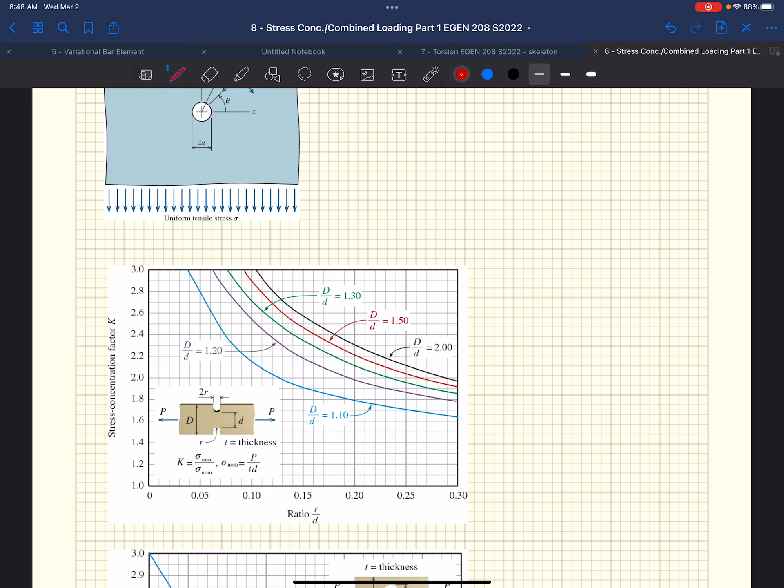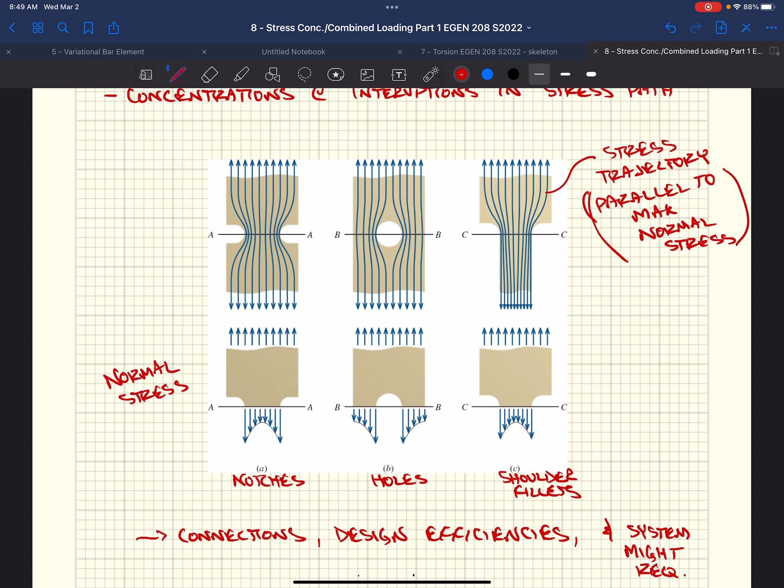And so we're going to need to start looking at these stress concentrations. How are we doing it in this class? Well, we're doing it very easily, okay? Not in a bad way - engineers are very lazy, as I've mentioned many times before. We don't like to redo something if someone else has already done it for us. So in this class, what we're going to end up doing is using very basic graphs that allow us to go out and figure out a factor that we would impose upon our stresses that we would normally calculate at a given location, and be able to relate those stresses to what are the maximum stresses - the stress concentration. So we amplify with this stress concentration factor our normal stresses, so that we can figure out what is the spike, or the peak of these stresses as we go through these changes in geometry. So the easiest way is just through these graphs.

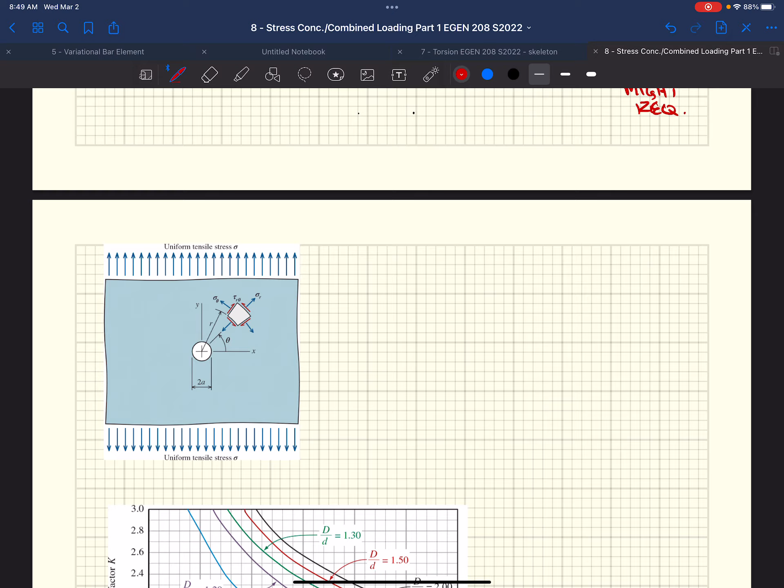So if we had this big uniform tensile stress over this plate, and we put a hole in the center of it, in order to move that stress we end up getting a series of not only normal stresses, but we end up with shear stresses - we'll learn more about that here soon. So we get stress redistribution and movement, creating normal and shear stresses around the perimeter of our hole.